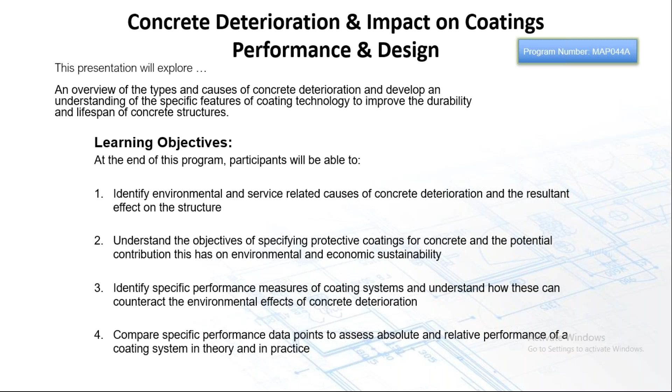So jumping into this, I want to start with a couple of concrete basics and understand that concrete is the most widely used man-made product in the world. The concept dates back to ancient times, obviously, but it wasn't until the 18th century that the use of hydraulic lime was actually pioneered. Traditionally, it's a very simple cement mixed with graded aggregates and water. It's now a much more complicated concoction of chemical reactions with admixtures to ensure durability and longevity.

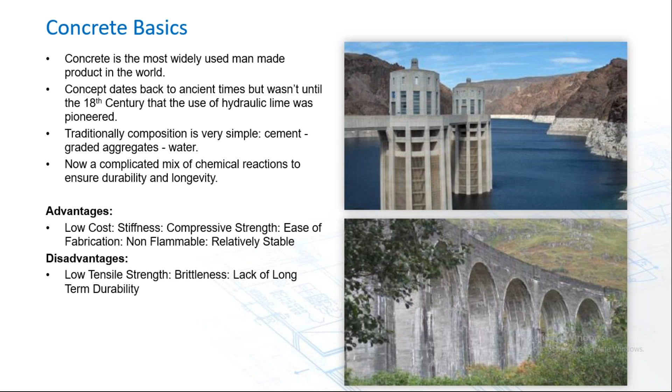The advantage concrete has is it's relatively low cost, great stiffness, excellent compressive strength, relatively easy to fabricate with. It's non-flammable and is a very stable substrate. On the downside, however, it has very low tensile strength. It is brittle and lacks long-term durability, and that's somewhat of a relative term. We see concrete structures standing for centuries, but as we get into this, you'll see what we're talking about in terms of deterioration and how it does impact that comment about long-term durability.

So concrete hardens through the process of hydration, and during the curing process, calcium hydroxide is formed, creating a very high pH condition within the concrete. It forms a passive layer around the reinforcing steel that retards corrosion. But sooner or later, defects that define deterioration will start to appear.

Concrete structures deteriorate with time and much faster in extreme environments associated with high humidity, presence of chlorides, CO2 in the atmosphere, wet and dry cycling. Ingress of damaging substances takes place through the pores of the concrete by the process of diffusion, and that really starts to initiate the corrosion of the reinforcing steel.

Onset of corrosion of the steel is accelerated when that high pH condition, or that passivating layer around the reinforcing, is destroyed by reducing the alkalinity within the concrete structure or within the concrete matrix itself. So then the steel corrodes, then creates a concrete spall, and that ultimately reduces the strength, aesthetics, and integrity of the structure. So that's pretty much it in a nutshell.

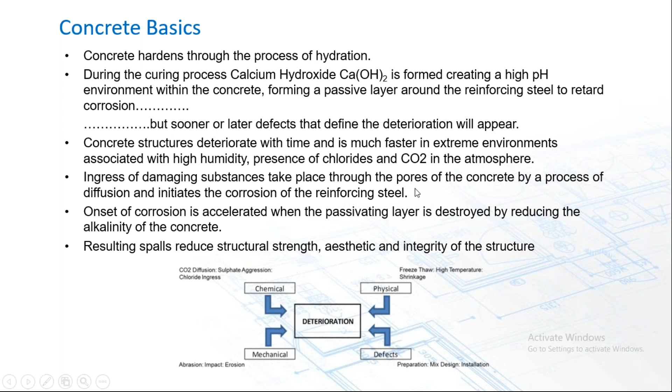But the components of deterioration generally fall into four camps: chemical deterioration, physical, mechanical, and then defects that might be entrained during installation or as part of the design mix. So we'll take a look at some of those.

Carbonation is the first one, and that occurs when CO2 naturally present in the atmosphere penetrates the concrete and reacts with the calcium hydroxide, producing calcium carbonate, essentially turning the concrete to chalk. The reaction reduces the pH of the concrete pore solution, destabilizing the passivating layer. Carbonation is generally a very slow process and depends greatly on relative humidity, temperature, and overall concrete quality.

There are plenty of predictive models out there, including accelerated carbonation tests simulating variable factors responsible for acceleration of carbonation. But the one that puts it in fairly simple terms for me is Brown's equation: take, let's say, 5,500 psi concrete under normal conditions, a carbonation wave front will extend into the concrete just under 1 inch, 7/8 of an inch, in a period of 20 years. So it is slow, and if that was the only thing that happened to concrete, that would be a fairly durable life cycle of a concrete structure.

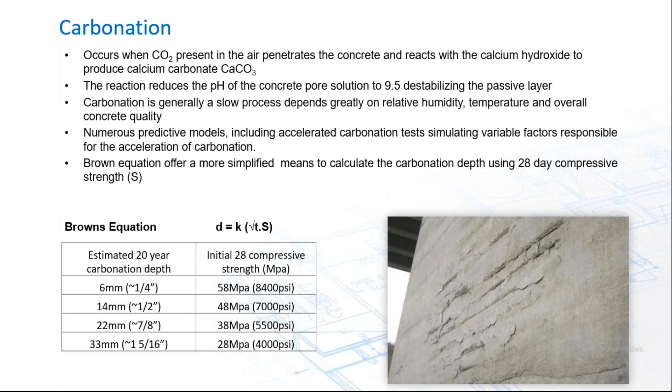But we're talking about a cumulative effect of a number of other deterioration effects as well. Sulfate attack occurs when naturally occurring sulfates of sodium, calcium, and magnesium are found in the soil and groundwater. As soluble ions, they're carried into the concrete matrix by water, and that reacts with the hydrated compounds in the hardened cement and expands, producing sufficient internal pressure that it can cause a loss of cohesion and strength. Concrete exposed to a higher frequency of wet and dry cycling, and porous concrete, are much more at risk.

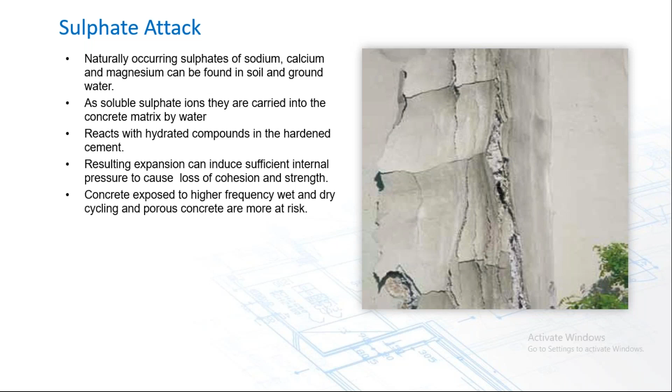Chloride ingress. Two-thirds of our population actually live in coastal states, and a third of our population live in coastal counties. So it's a very aggressive environment with salt-laden sea air, and chloride ingress is really the primary cause of corrosion of steel reinforcement. Chloride ions are also present in the de-icing salts we use on our roads during the winter time, in airborne pollutants, and even some concrete admixtures also contain chloride ions.

These dissolve in water, permeate sound concrete, and reach the steel through defects. Carbonation also lowers the amount of chloride ions needed to promote corrosion. Depending on relative humidity, temperature, chloride concentration, wet and dry cycling, etc., chloride penetration can reach 1 to 2.5 inches into ordinary Portland cement in as little as 5 years. And typically we're only talking about a 2-inch cover on reinforcing, so you can see how aggressive this can be in really creating a problem for concrete structures.

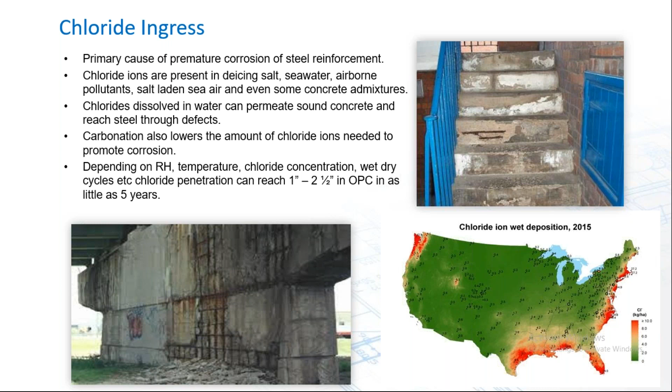Freeze-thaw is also a bit of an issue, where water is allowed to seep into concrete, where it might freeze and then expand by about 9% by volume. In moist concrete, this can produce sufficient internal pressure within the pores and capillaries of the concrete to exceed the tensile strength of the concrete. Then we start seeing those cavities dilate and rupture, and ultimately we see scaling and cracking or crumbling of concrete. A couple of good examples there are a sidewalk or a brown coat over a scratch where water has been allowed to freeze.

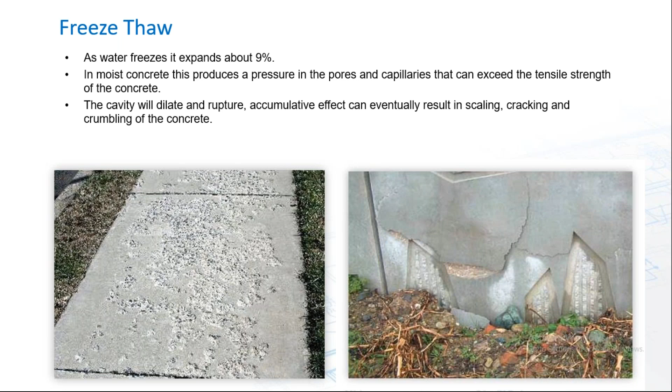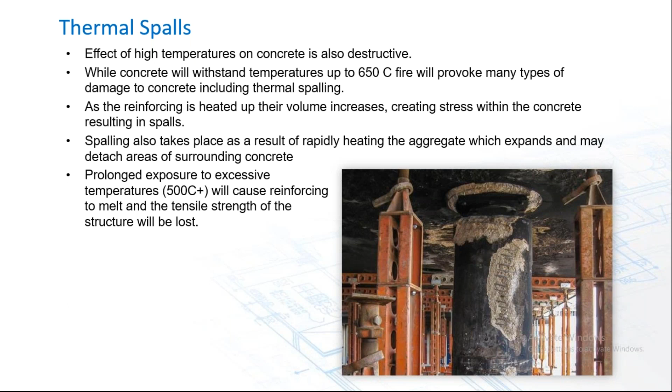Plastic shrinkage typically occurs during the hydration process, where there's a rapid loss of moisture on the surface, and as a result, tensile stresses between the softer concrete below and the harder drying surface above create internal stress, and we end up with cracks propagating through the concrete cross section to varying depths. Once again, this becomes a direct route for contaminants and chloride ions, particularly to start the journey towards the reinforcing.

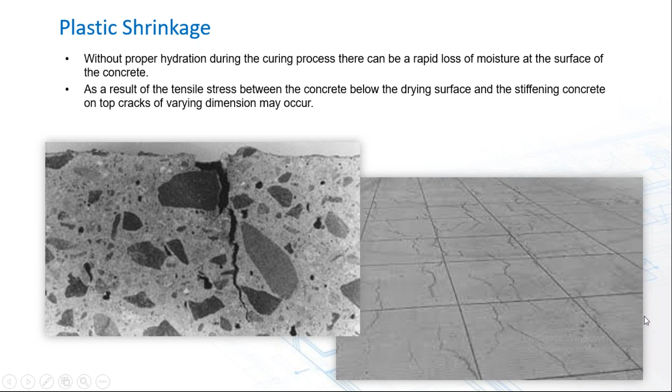Abrasion, impact, and erosion are also things to consider in our assessment of concrete deterioration. Just the effects of normal maintenance and wear and tear on the concrete surface, such as a snowplow, given the example of that parking garage on the left there, or the constant dripping of water onto a concrete surface, is sufficient to erode the concrete itself.

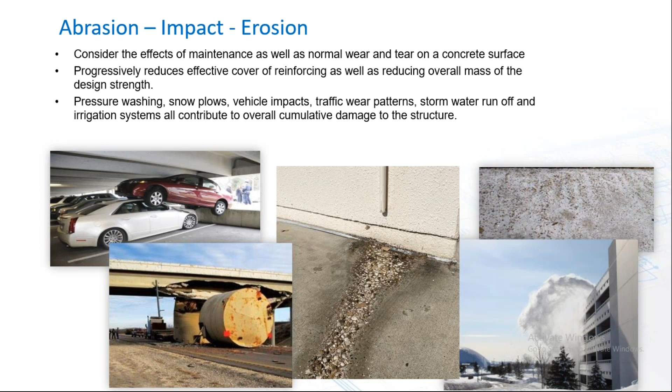Then, of course, there's the human factor. While we can repair much of this damage, we'll always have that cold joint, and that becomes the weak point, the point of entry for contamination and deterioration to restart.

Installation defects can occur frequently. The positioning of formwork is critical. Although this is an ICF form, you can see how wavy that is, and it doesn't give the reinforcing the entire 2 inches that's normally required in the building code.

But through overcompaction, we can see a separation of the larger and the small aggregates, as you see there in the middle, which results in an uneven stiffness or strength across that cross section.

A lack of cover, as I mentioned, with the positioning of formwork, really leaves the rebar exposed very near the surface. Under compaction, we can end up with honeycombing, bug holes, and things like that. Obviously, this reduces our effective cover over reinforcing, but also creates a gateway for contaminants to start their entrance into the concrete.

And ultimately, we end up with things like spalls, but also efflorescence, where soluble salts are washed out of the concrete matrix.

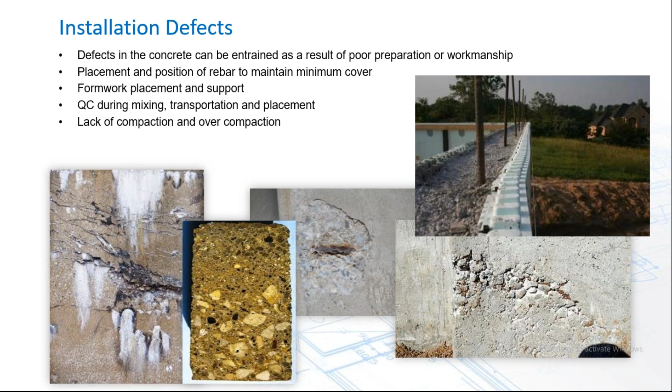So, knowing what we know about concrete now, let's take a look at coating solutions or waterproofing solutions for concrete. I did put an asterisk there ahead of waterproofing, because in a couple of slides I'll give you a definition on waterproofing.

We talk about waterproofing, weatherproofing, and damp proofing fairly freely, assuming everybody knows what we mean by those terms, but there is a distinction. Regardless of the condition or quality of concrete, it'll remain both permeable, porous, and subject to deterioration as a result of the presence of moisture in the structure. Chloride ingress, ASR, freeze-thaw, sulfate attack — they all require the presence of moisture to act as a vehicle to transport soluble ions into the concrete matrix.

With moisture being the root cause or key contributing factor to concrete deterioration, in my view, it should be preferred that concrete is treated or waterproofed to protect against moisture infiltration, either as water vapor, and also protect against CO2 diffusion.

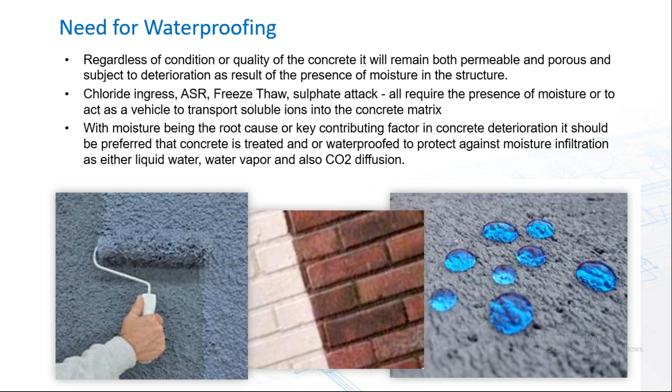This is the distinction I wanted to make. Waterproofing is the treatment of a surface structured to resist the passage of water under hydrostatic pressure. Damp proofing, by contrast, or weatherproofing, is the treatment of a surface structure to resist passage of water in the absence of hydrostatic pressure. So it's really in that below grade condition where we talk about waterproofing.

Just a bit of trivia to understand the extent of hydrostatic pressure, or its magnitude: a column of 1 foot of fresh water exerts approximately 0.43 psi, or conversely, 1 psi of fresh water would require a column of water 28 inches high. So when we're talking about above grade waterproofing, it's not really subject to hydrostatic pressure — we're really talking about weatherproofing or damp proofing.

But as I said earlier, those terms are freely used and are very much interchangeable. There are certain conditions, though, that separate waterproofing from the other things.

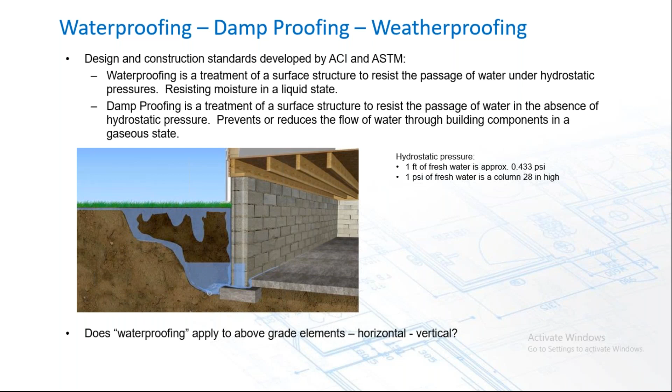Crystalline waterproofing can be employed either as an admixture or as a surface treatment. These chemicals react with the available water, and crystalline structures develop within the open pores, capillaries, and hairline cracks of the concrete to seal against further moisture ingress.

Understanding that concrete is full of pores and capillaries, this creates an additional growth of these crystalline structures to prevent moisture ingress. It becomes an integral part of the concrete and will continue to react with available water.

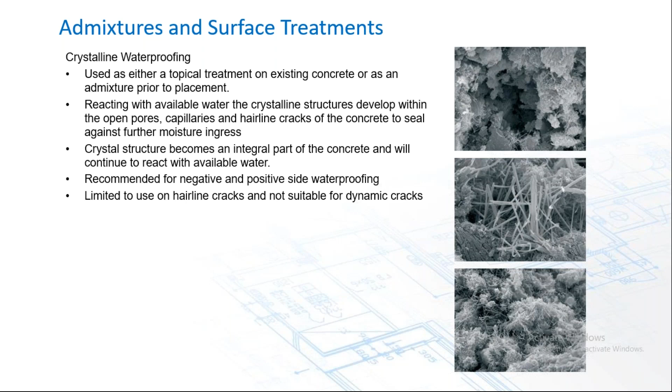It's recommended typically for negative side or positive side waterproofing, and really limited to use on hairline cracks — not suitable for dynamic cracking. So again, we call it waterproofing, but if it doesn't have any effect against dynamic cracks, well, it's not really much of a waterproofing treatment in my view.

Mineral silicates can be incorporated in an admixture as well, or as a topical densifier. When combined with inorganic pigments, these mineral silicates can also be used as a decorative finish. The silicate reacts with the calcium hydroxide in the concrete to create calcium silicate hydrate.

This, much the same as the crystalline treatment we saw on the last slide, fills the open pores within the concrete vacated by the evaporating water. Again, not really truly speaking a waterproofing system, as it will not bridge cracks or prevent cracking.

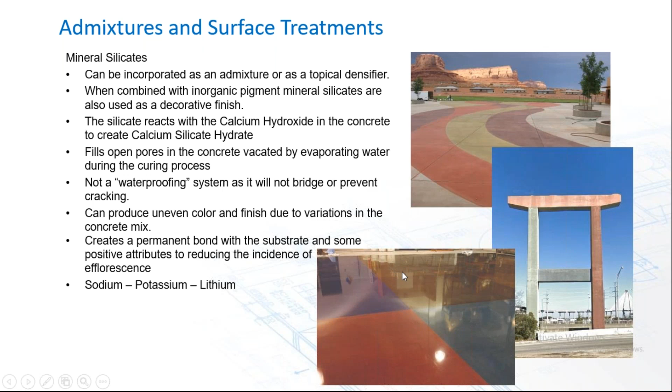It can produce, when used as a coating, an uneven color and finish due to variations within the concrete mix. It does create a permanent bond with the substrate and has some positive attributes in reducing the incidence of efflorescence. Typically these densifiers incorporate sodium, potassium, or lithium silicate. Just a couple of examples of typical uses you might encounter there on the right.

Water repellents. We encounter these usually as silanes and siloxanes. Those are the two most common penetrating water repellents and sealants. They remain vapor permeable, non-film forming. They don't typically transform the appearance of the concrete much beyond its natural gray color. They can be used horizontally and vertically. They do weather over time and require reapplications as they weather away. And once again, not a true waterproof system in the strict sense of the word.

Silanes chemically react with calcium hydroxide in the concrete to form a hydrophobic layer within the pores and on the surface of the concrete. They're really only effective on concrete or masonry, and penetrate much deeper than siloxane. It does require that calcium hydroxide to react with. Siloxanes, on the other hand, react with atmospheric moisture and the moisture within the substrate, and then you can use those on non-cementitious materials like clay, brick, and stone.

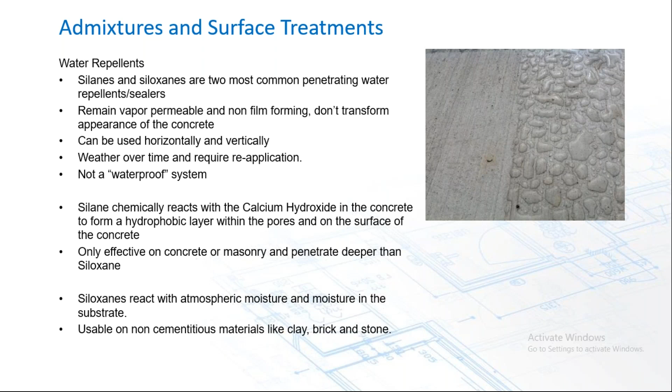But then we get to my favorite, masonry waterproof coatings. In my view, there is actually no substitute for a protective coating barrier between the substrate and the elements responsible for its deterioration. They protect against moisture infiltration, provide crack bridging, and in doing so, we can also protect against CO2 diffusion as well as chloride ingress. Along with the protective barrier, a coating will provide some aesthetic value. It's just me, but it's so much more appealing than uncoated gray concrete. Because of this, coatings will extend the deferred maintenance of a structure and ultimately increase the lifespan of a building.

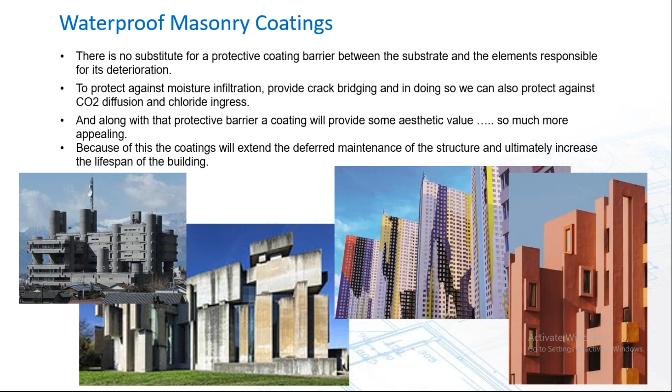The selection and application of the right coating systems are important to mitigate adverse environmental effects, compensate to some degree for defects in placement, and overcome some of the inherent problems with concrete. Concrete can be a very challenging substrate to paint on or work with. As a coatings manufacturer, our challenge is to design a breathable, waterproofing, and protective coating system to maximize the service life potential of the concrete structure. It's important to know that not all coatings are created equal, so it's vital to understand the information presented to us in selecting an optimum system design.

We're faced with laitance or dusting on a concrete surface due to perhaps overwatering of a concrete mix, and that creates a bond breaker, as you see on the right. The high moisture content in concrete, 5% and above typically, can create issues with vapor drive, and I'm sure most of us here appreciate the blistering that might occur on a coating when concrete is moved into the sun or shortly after coating.

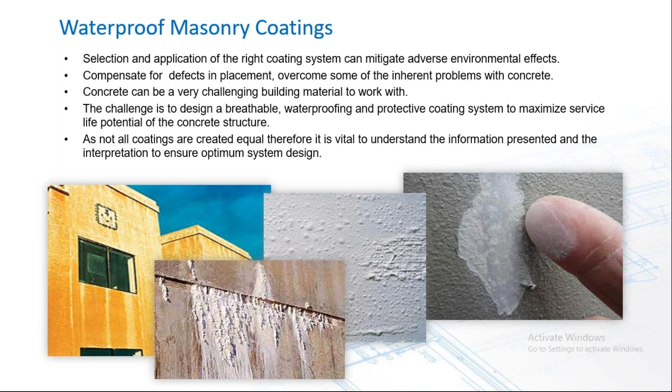To understand the comment about not all coatings being created equal, competition's good, and there's lots of paint and coatings manufacturers out there, and to some degree paint companies have inherited access to our commercial coatings market. Paints and coatings are quite different. They satisfy two different needs. They're built on the same four building blocks, but I'll expand on that thought a little bit.

It wasn't that long ago that Master Spec really only used paint brands with national coverage, specifically Sherwin-Williams, ICI, Glidden, Benjamin Moore, and PPG. Those were the four basics for the Master Spec specification system. In 2003, to give regional paint companies a bit of an entry into this space, they incorporated or accepted that manufacturers with Master Painters Institute qualifications or approvals could also be included in the Master Spec, as well as the four nationals. So even today, MPI Master Painters Institute product approvals are essentially paint companies.

The only two I can detect there, other than those, are MAPEI and Euclid. So you can see there that index - I think that was copyrighted in 2012, but it's actually the table of contents for the master format of 1995. So, as I said, there are these legacy coatings and painting specifications out there.

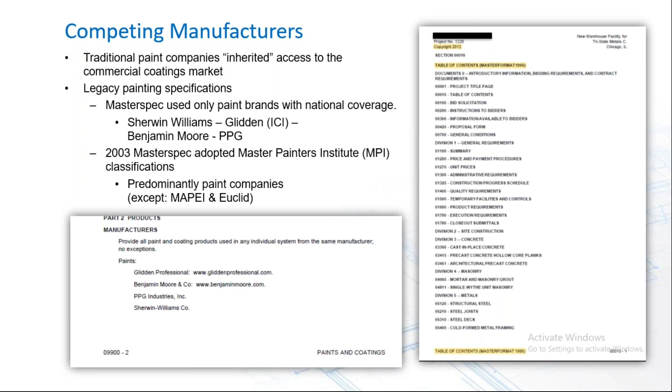So we can end up in a situation where specifiers now have to put in comments in their specifications like this, so that residential products are not permitted - but then the list of approved manufacturers, acceptable paint manufacturers, well, most of those guys are actually residential paint product manufacturers. And you can see there on the left side where the MPI product approval will get you entry into this specification.

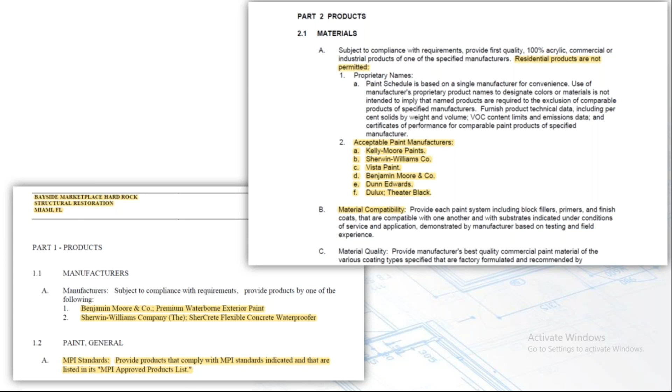You'll understand that there are paint and coatings manufacturers out there competing now in the same space, with products of varying quality. I bring this slide in as a comparison of a specialty facade coating, specifically for waterproofing and protection of concrete substrates, versus a paint company that has produced their own facade coating, and a paint company. Frankly, these are three products we encounter regularly in facade restoration specifications. While they are relatively similar in terms of physical attributes and volume solids, the higher solids coatings products actually do offer some advantages in terms of higher film build, application efficiency, and a higher film build equals better film integrity over time.

But then we jump down a little and look at the performance tests, and you can see that the manufacturer that's gone to the extra effort of getting their products independently verified and validated by the Sealant Waterproofing Restoration Institute has a lot more test data to be able to convince you as a specifier that this is the right product to use, rather than trading on a brand name that's been around for a long time and trusting it will be okay on the day. You can see that the test data just doesn't exist.

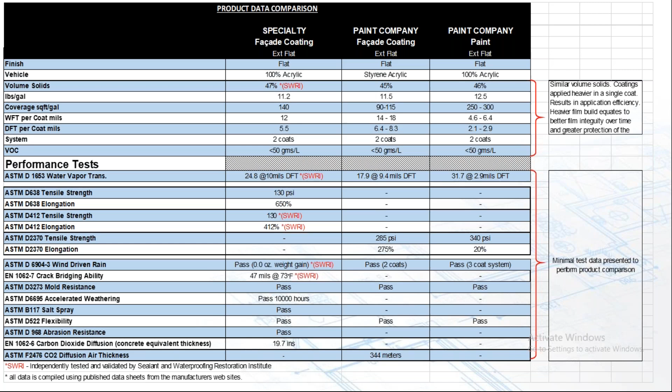So I hope I make the case that these paint products have their applications, so do the coatings, but they shouldn't really be confused and attempt to be used on the same structure and expect a similar result. They're really quite two different beasts.

You'll see coatings manufacturers will trot out a CO2 diffusion test. There's a lot of science behind this, but really at the end of the day, we're talking about creating an effective carbonation barrier to prevent that wave front from even entering the concrete.

Where you'll see a tech data sheet from a manufacturer with an R value, not to be confused with insulation, but an R value in excess of 50 meters, this means it will prevent that carbonation wave front from reaching reinforcing steel in 60 years. So we're talking a very effective carbonation barrier. To put that in other terms, if you wanted to give your concrete the same protection as that one coat or one application of paint or coating, you'd need to apply something in the order of another 19.7 inches of concrete as a sacrificial layer to provide your structure with the same protection.

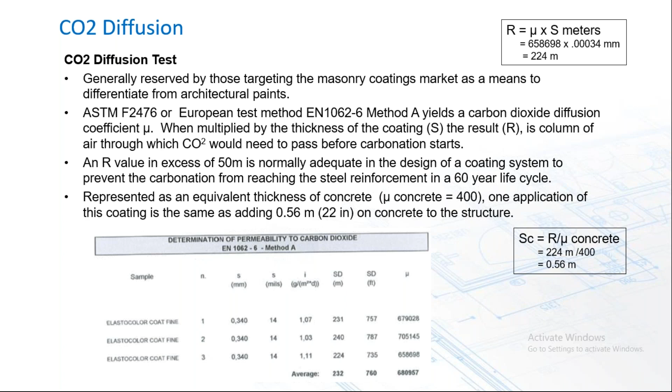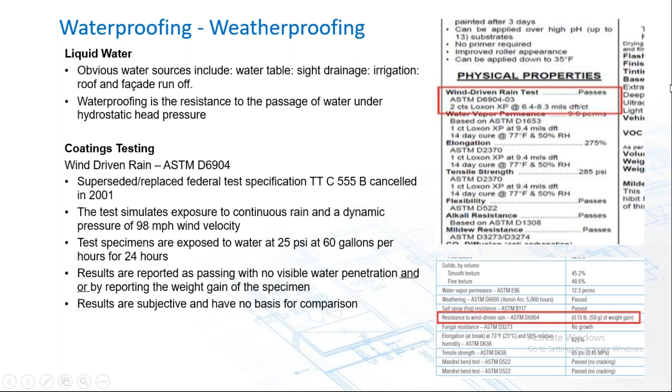Water vapor permeance and permeability, and this is a real mind bender. There are 4 different tests: wet and dry cup, as well as ASTM D1653 and E96.

Essentially, the coatings industry has really fallen in behind ASTM D1653. However, what it does in the first process of its measurement is determine water vapor transmission, WVT, which is grams per square meter per 24-hour cycle. Then a calculation gives you water vapor permeance, and this only measures a rate of transmission or permeance. So to compare 2 coatings, they really have to be of the same thickness. The calculations within the test of ASTM D1653 don't actually go that far; it doesn't actually take that step to calculate permeability.

ASTM E96 actually measures permeability, also expressed in perms, but film thickness needs to be greater than half an inch thick, and there are all sorts of adjustments that need to be made, and at that thickness it's really not a practical measurement for organic paint films. Permeability is the only means to compare competing coatings at different thicknesses.

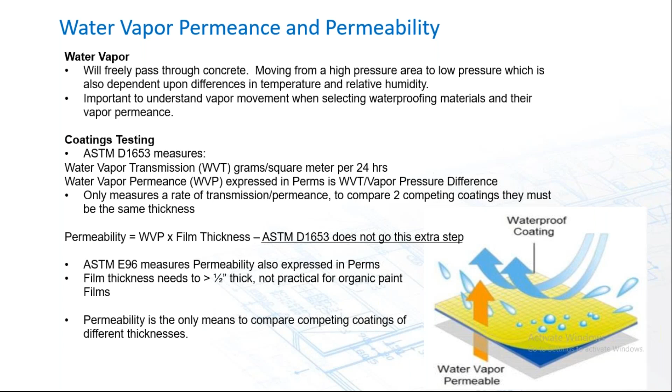So pay attention when you're looking at the test results for ASTM D1653. Manufacturers should provide you with the perms and the film thickness at which it was tested, because it is a linear relationship: twice the thickness is half the permeance. So you need to take that into account.

Chloride ion permeability, this is a bit of a red herring in my mind and a waste of space, because the test is conducted on concrete, and concrete within the confines of this test, ASTM C1202, already has a very low chloride ion permeability. So when you see a test like this and a manufacturer claiming it has a low permeability class, it really means the concrete was doing its job anyway without the coating.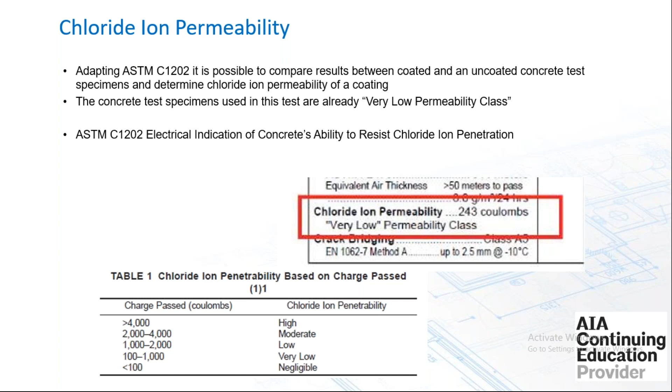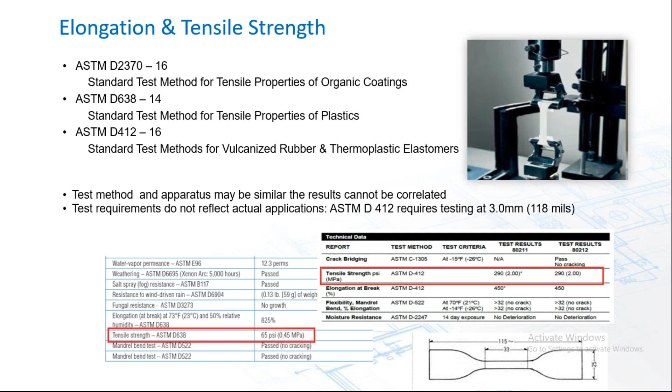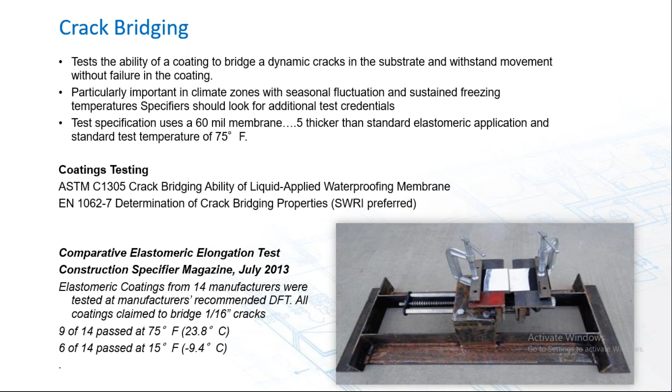SWRI have adopted EN 1062-7, a European standard, that reflects more than a pass-fail at two temperatures - it reflects the coating's ability to stretch, or bridge a crack, at 3 different temperatures. So it gives manufacturers a little bit more latitude in terms of displaying meaningful data to a specifier.

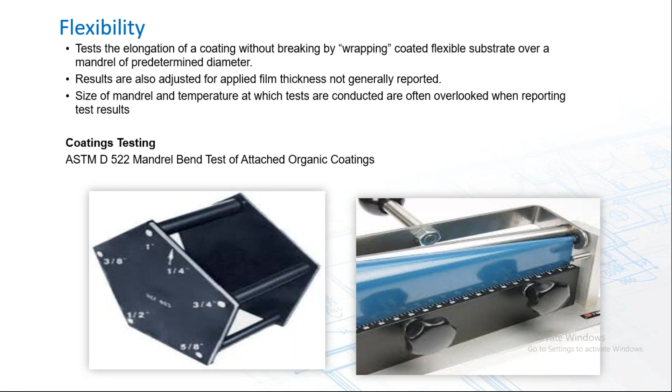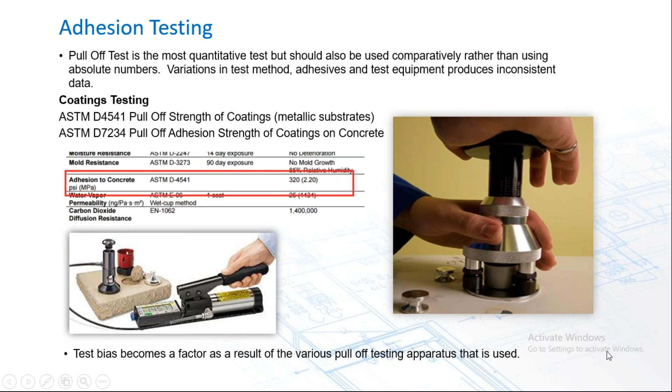Unfortunately, there are 5 different test apparatus, and testing bias becomes a factor as a result of the various apparatus used. But it's great again for a comparative test where you have competing manufacturers on the wall, or you want to test the adhesion of the existing coating versus the effects of applying the new coating. As an absolute number, though, there's not a lot of frame of reference.

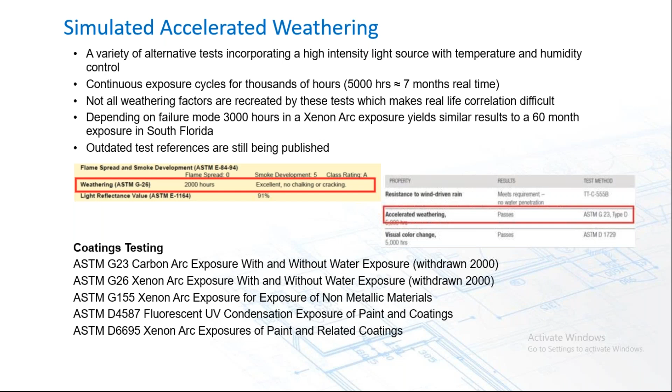But sadly, things do change, and sadly some of our competition are caught out with these changing requirements. You can see here they're still publishing this data even today, 20 years after the ASTM standard has been withdrawn, as accurate and current information on the performance of their product. So something to be a little bit aware of, because certainly those two ASTM tests have been replaced.

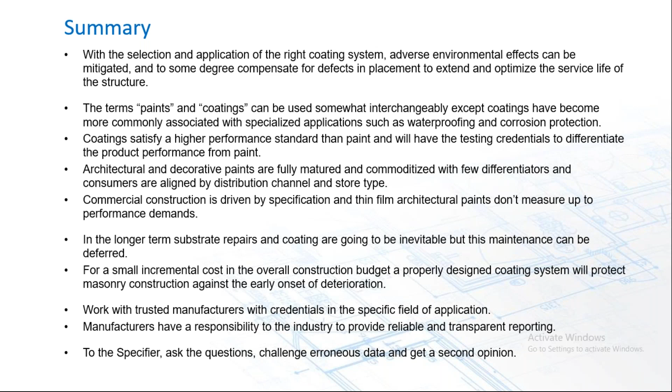So to the specifier, I'll ask you simply: ask the questions, challenge erroneous data, and get a second opinion. Guys in my position will be glad to—even if we're not on the spec—provide you with perhaps an objective point of view as well.